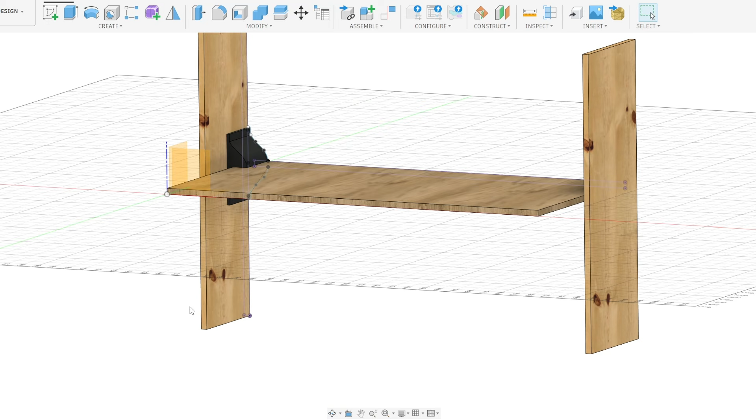As usual, I start in Fusion 360. First, I create a model of my setup. This weird wave-looking thing is a clamp, and it's going to do all the heavy lifting. And this thick bolt makes sure the desk doesn't slide out.

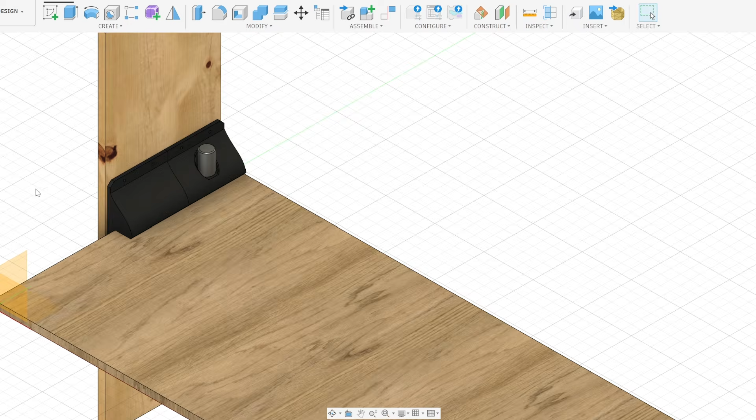Now, can one clamp support the entire desk? Unlikely. So I added a second one, in case it fails symmetrically.

And then I made this extension. It kinda looks like an aircraft carrier. More support, less regret.

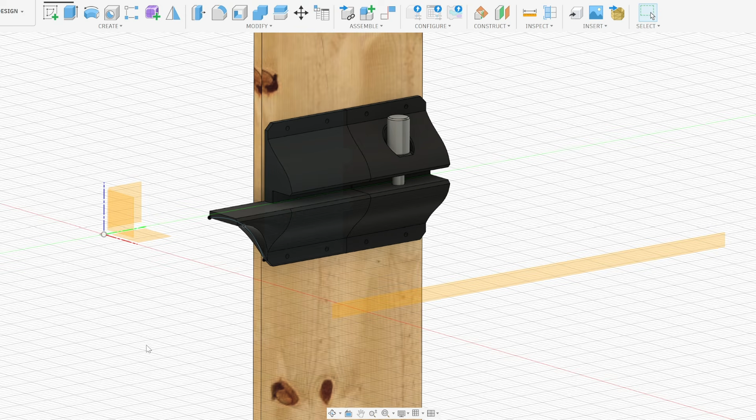Chamfer everything, mirror to the other side, and the full assembly is ready.

I added left and right markings. This is just a precaution.

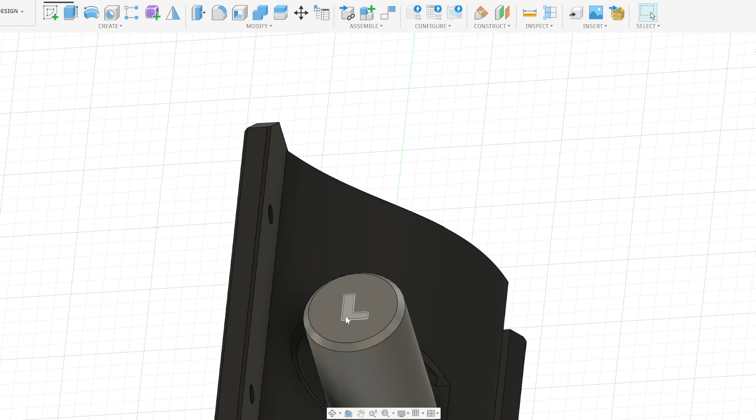Material choice: ABS. It gets pretty hot here in Australian summer, PLA would just not survive.

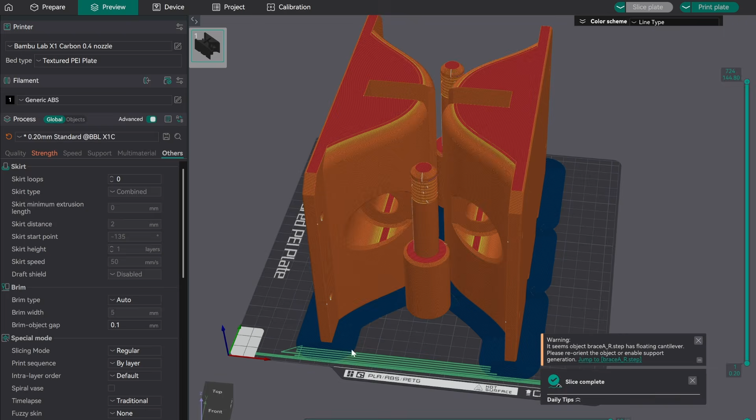One small detail added: fuzzy skin on the bolt handle.

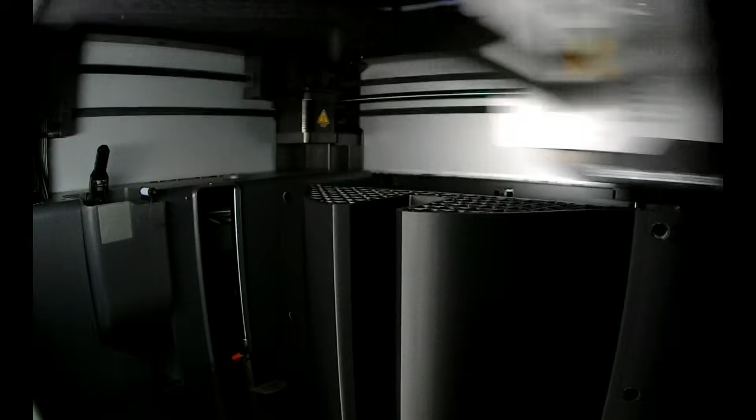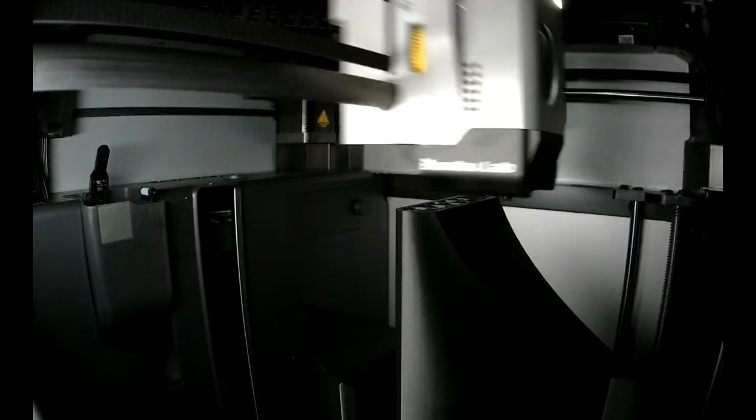With the prints now done, it's time for the desk. I'm using solid beech wood panel.

I says... bitch. You said that. Ain't nothing but a thing. But you said bitch though.

It's hard, stable, and actually makes sense here.

These red and black bird-looking things are my jigs. I designed them a while ago and now they just keep being useful.

Quick cutout for cables. For the corners, I'm using a trim router, a long straight bit, and my 3D printed templates.

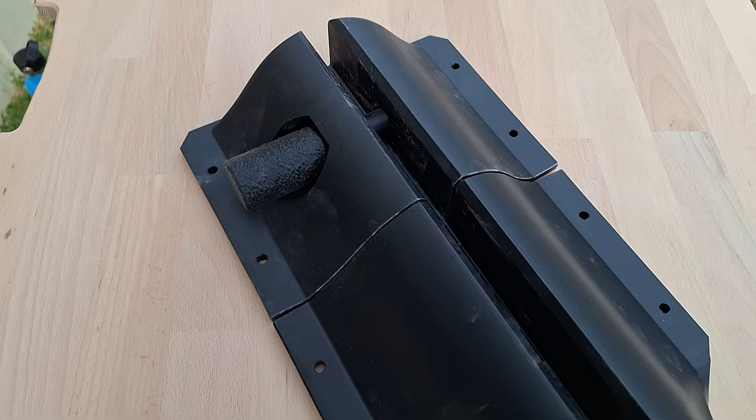I finished it with furniture oil, nothing fancy, just does the job.

Everything ready: desk, supports, screws, tools. Time to install.

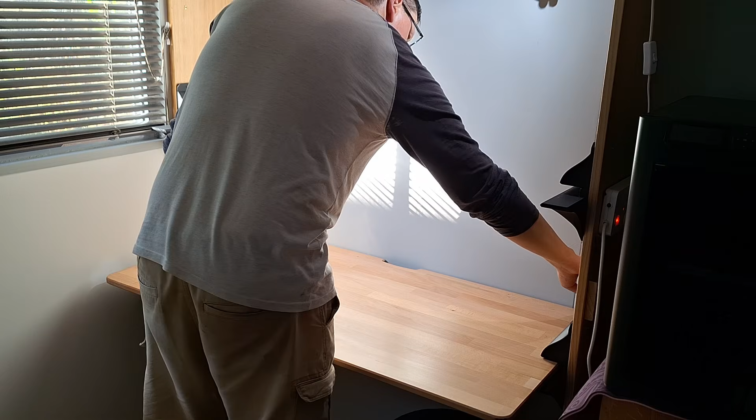And this is how I switch from sitting to standing. Takes a few seconds.

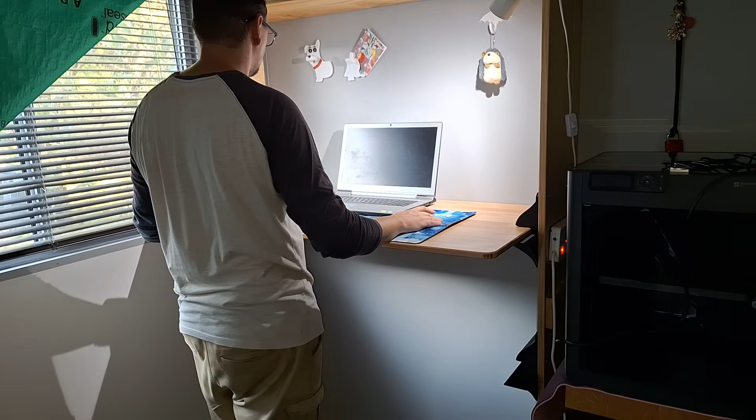This is done now. The desk is surprisingly strong. I'm going to work with 3D prints here, clean them up, maybe occasionally work with the 3D printer, so this platform has to take some weight, including my own weight, so I can lean on it without being afraid that it's gonna fail. So these black things worked better than I expected.

They're made out of ABS, strong material obviously, and yeah, this is purely mechanical, adjustable height, stand-up desk and sitting desk, whichever you want. Very happy.